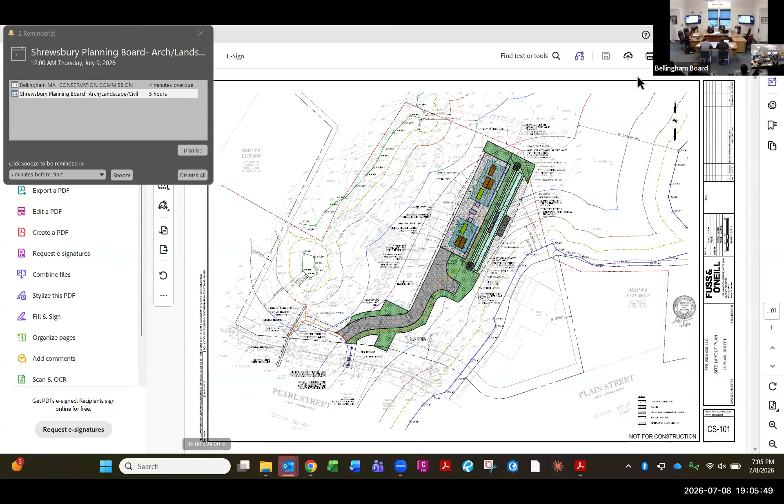Yeah, I'll let you jump in. Yeah, so as Tom mentioned, my name is Jack Denninger. I'm a civil engineer with Fuss and O'Neill. We worked on the site plans that you see here.

So as was mentioned, the site's located at 26 Pearl Street, which is identified by the town assessor as map 4, lot 60, and it's owned by the town of Bellingham. The site is approximately 19.5 acres, and it's bounded by woods to the north, the Charles River to the east, Pearl Street to the south, and then residential properties and woods to the west.

So the existing site within the limit of work generally consists of concrete foundations and material stockpiles. Again, which is generally speaking what you're seeing on the plans here. The northern portion of the site does become wooded, but for the purposes of our limit of work in our area, the existing conditions is primarily impervious with concrete foundations and material stockpiles.

Wetland resource areas were delineated by LEC Environmental Consultants on February 10th and 18th of 2022, and then confirmed on March 19th of 2026.

Those resource areas consist of bordering vegetated wetlands to the west and northwest of the existing developed area, isolated vegetated wetland to the west of the existing developed area, bank and mean annual high water line to the Charles River to the east, and the 200-foot riverfront area associated with the Charles interior to the site. A portion of the site does lie within the 100-year floodplain, however all of our proposed work is at an elevation above the 100-year floodplain elevation.

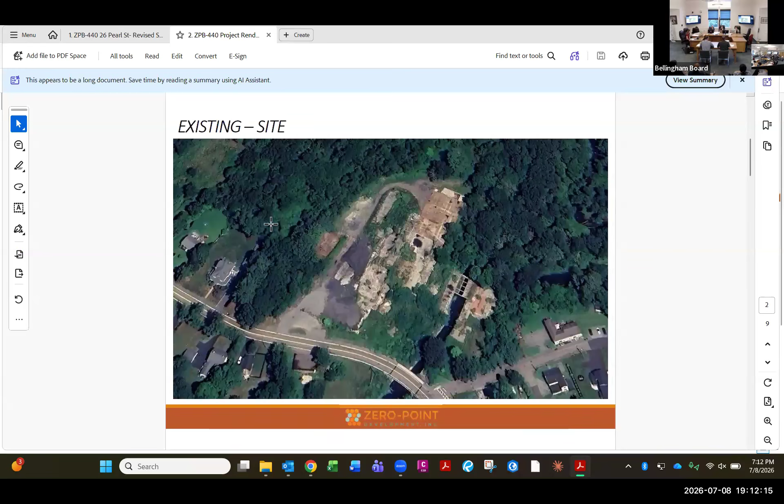So this is existing conditions of the site. Got two pretty massive piles of asphalt millings on site right now, and then there's a big pile of bricks in this general area here right now.

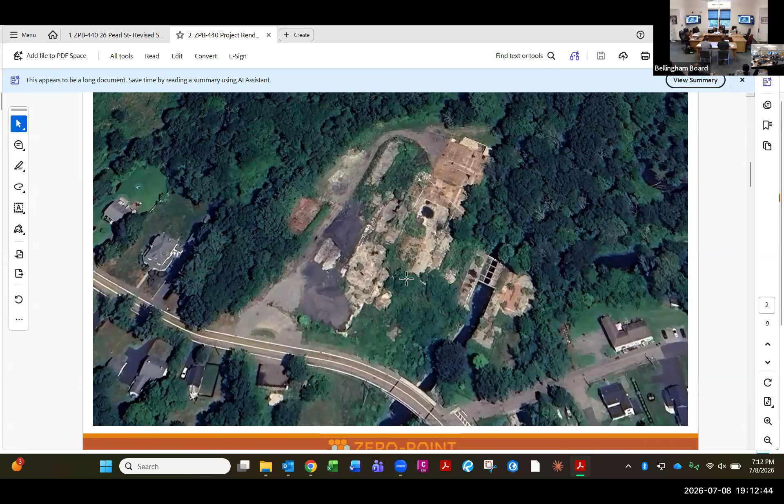So that's all going to be, well, the asphalt millings are the DPW's and they may move them to the other portion of the site, but the bricks over here along our site will all be removed from the site.

This gives a good depiction of what the site looks like when it's constructed: the access road coming in, turn around, infiltration basin along that eastern edge, and the electrical equipment all in a row. It's about a quarter acre of area that's going to be fenced in, and the remainder of the site is left for DPW facilities usage.

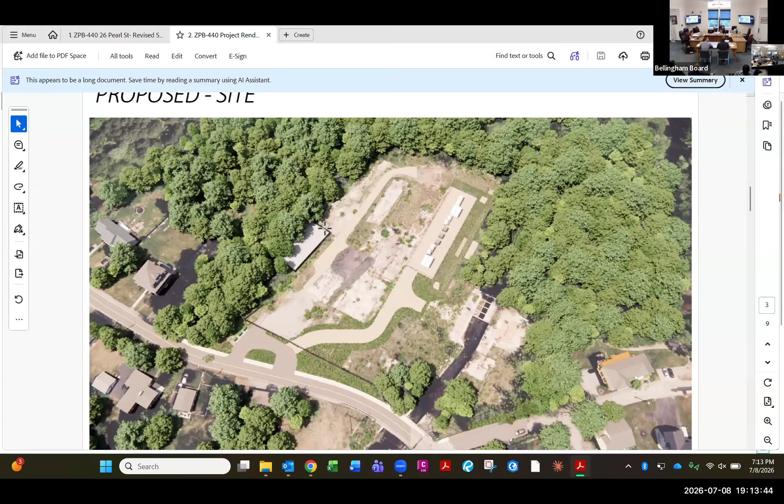Part of the request for proposal requires us to install a new fence along Pearl Street and plantings along Pearl Street, as well as a small material handling area, tan with a black outline, that the DPW uses maybe for some catch basin stuff. I'm not really positive what they use it for today, but we're proposing a fence there as well, as part of the request for proposal.

So that aligns with everything that we're required to meet. There's some extra screening here from Plain Street.

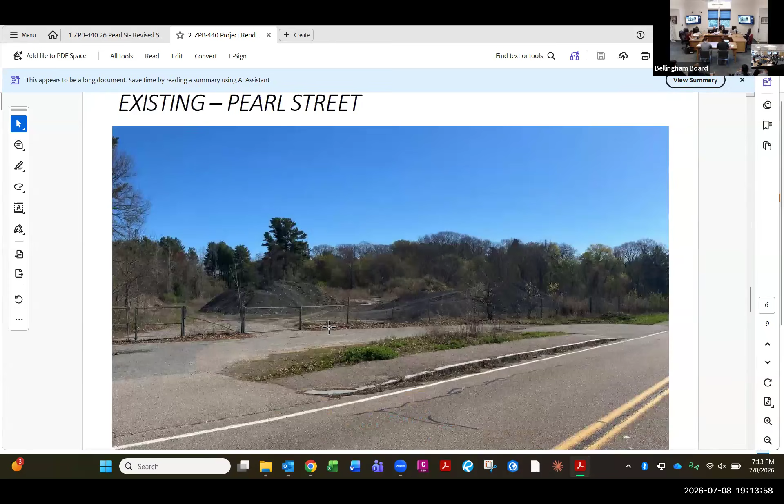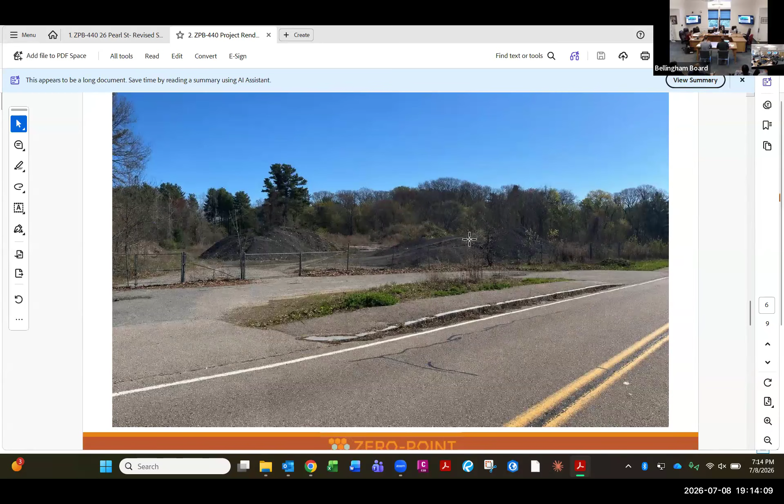Existing Pearl Street, you see the asphalt milling piles there. Our access road pretty much comes in to the right, to the east side of this front-most existing pile of asphalt millings. And here's proposed conditions with the new fence.

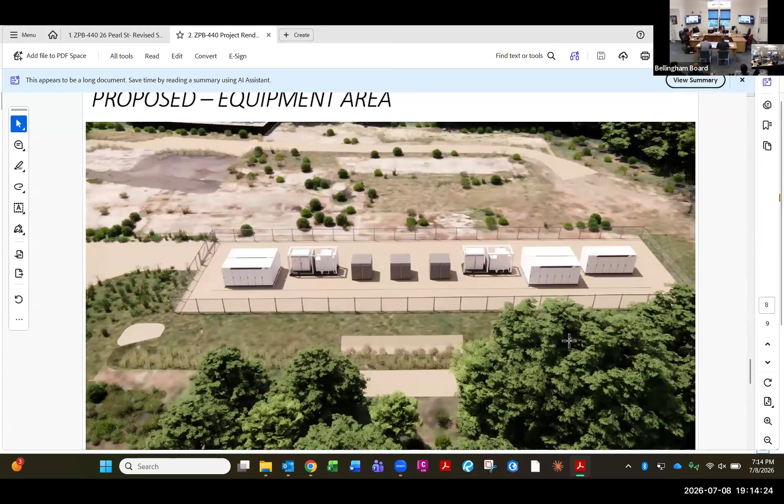We are bringing a hydrant across the street, just to note. And here's the site a little bit closer, zoomed in.

So Jack touched on secondary containment. We anticipate DEP drawing down some comments to require, under a condition, secondary containment of firewater runoff, the potential of firewater runoff. This has been consistent for the last probably 2 years out of the DEP office, and we have that language. We've worked with DEP on many other projects, and we've built and designed this system to meet those standards they would like to see. So just wanted to touch on that too here.

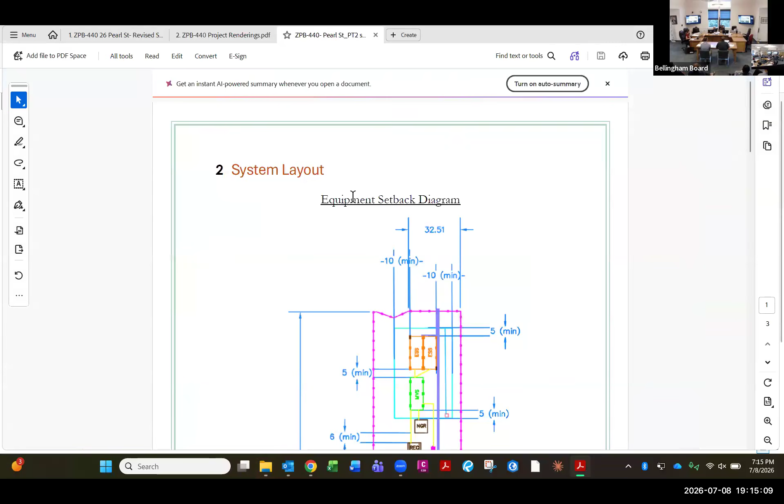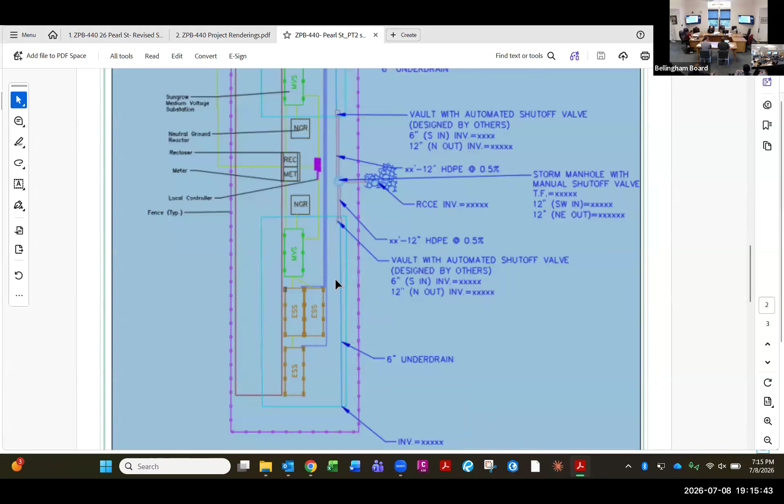So within the fence, we've got 2 areas of containment. The first one is this area here, containing any water falling within this zone around these three southernmost energy storage containers, as well as the green medium voltage substation, which is essentially a transformer. We did add that into the secondary containment area.

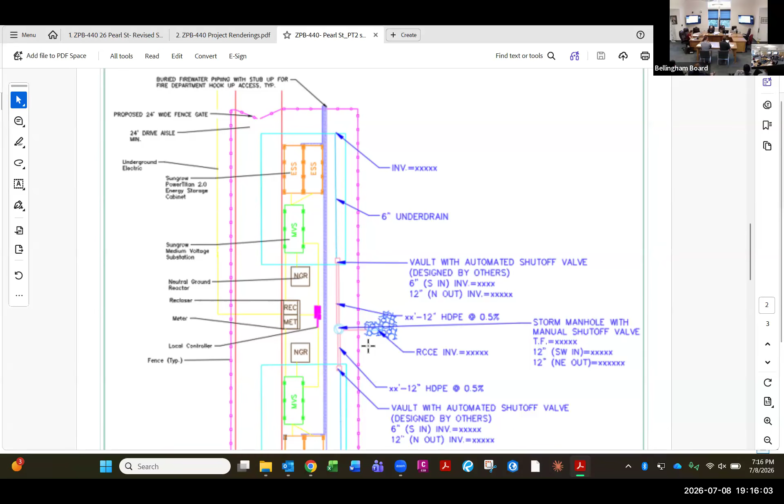And then to the north, there are two more battery containers with another transformer skid, so there's a separate containment area here. When we look back at the plans, they don't necessarily flow as shown on this diagram. The northern portion flows out to the north and into the sediment forebay, and the southern portion flows to the south and out into the sediment forebay down there.

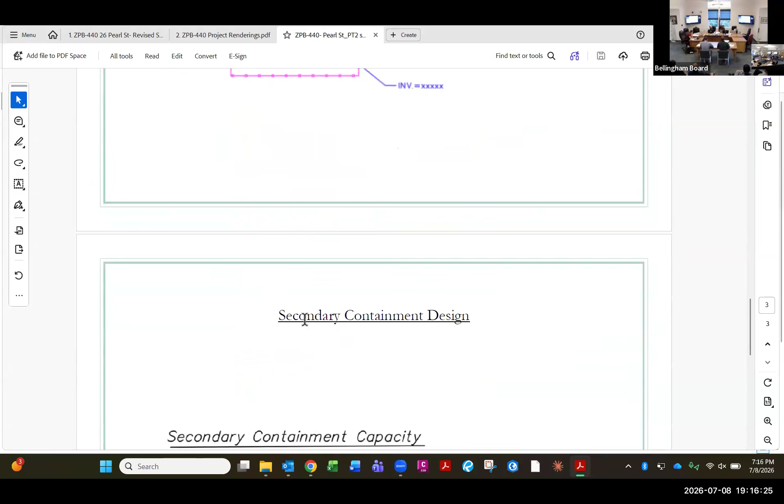So just to give you an idea, we're about 10 feet off the sides of the containers in each direction. And then I've got a volume calculation here: the total volume of both combined would be 17,000, roughly just under 18,000. But the northern portion, being the smaller containment area with less equipment, holds right around 7,000 gallons.

It's 1.5 feet deep, underground subsurface secondary containment system. It's a polyvinyl membrane, and it is constructed and installed by Basic Concepts Inc., so they're our contractor for the secondary containment.

They do systems similar to that you would see at the substation across the utility easement for large transformers. So it's essentially a polyvinyl membrane, just a big piece of rubber that goes subsurface 1.5 feet. It's covered with crushed stone for 6 inches above it. That's called a fire quenching stone.

So any liquids that may be on fire - in this scenario there's nothing that would be on fire as a liquid - but it does quench the flames as it goes to the ground. The southern portion has a containment area with a capacity of around 10,500 gallons roughly.

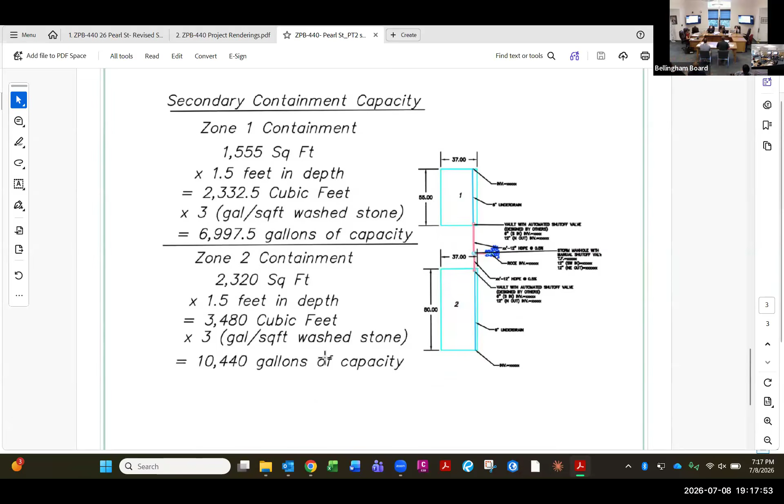So I just wanted to touch on that and show you here. This portion drains to an under drain on the eastern edge of the secondary containment that goes to a vault box within that containment area that has an automatic valve. So upon an alarm of an overheat, or if there was a fire and an e-stop was hit, that vault with the valve would shut, and that would essentially create a bathtub.

So any fire water that's used to essentially cool surrounding containers - there's no putting water onto a container that's on fire, you let the energy burn out - any water that falls within here would be trapped, and somebody like Clean Harbors would be there to pump that out, with water testing thereafter.

And I think we'll see that come down through DEP as a comment. But operationally, in normal operation, all that water is allowed to evacuate - it's just falling through the crushed stone and evacuating on a normal daily basis until an alarm is triggered, which creates the bathtub.

There's also another manhole just outside of each of these containment areas that has a manual valve as a secondary measure. That is also something we'll see as a comment from DEP as well. So I just wanted to touch on secondary containment and what that looks like.

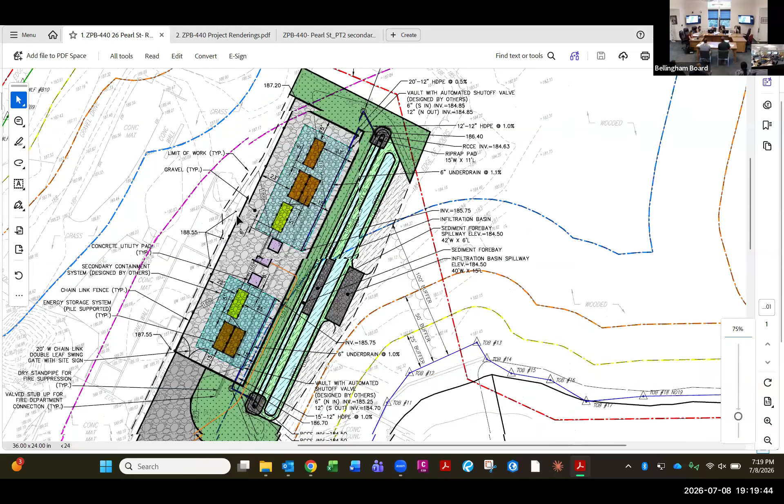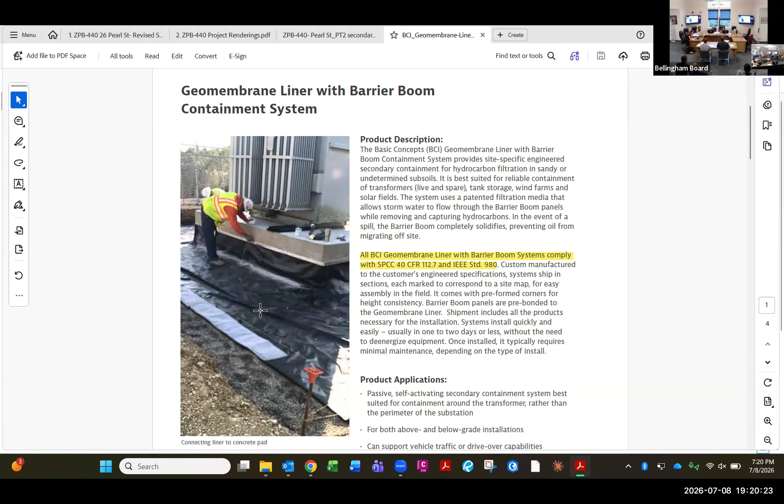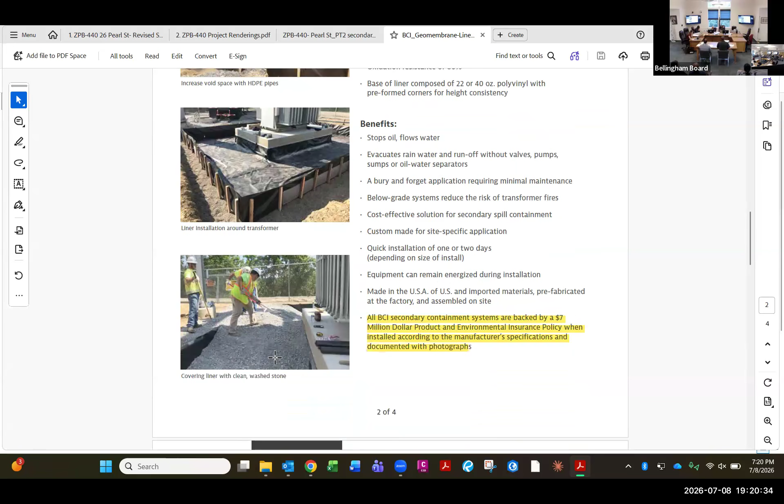So this middle picture here is really what it looks like when it's installed. And then it gets filled with the stone here, as you can see in this bottom picture.

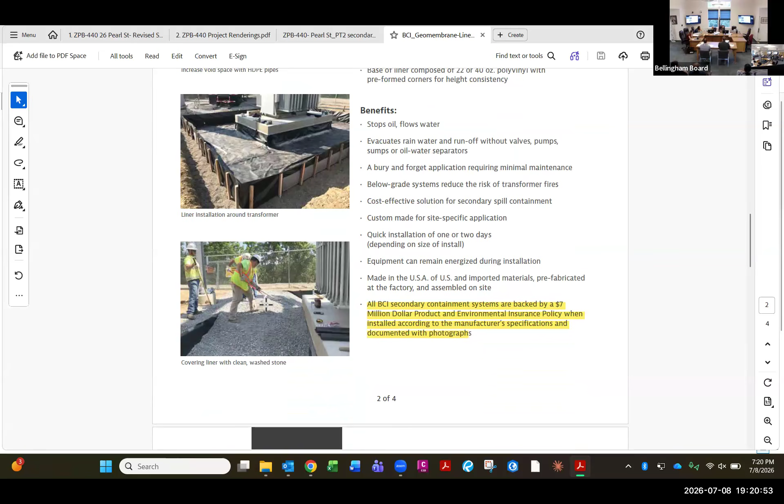All these secondary containment systems meet full SPCC regs. Not that this system has to abide by it, but it is a system that is backed also by a 7 million dollar environmental insurance policy through BCI. And this is just kind of a little rendering of what that might look like.

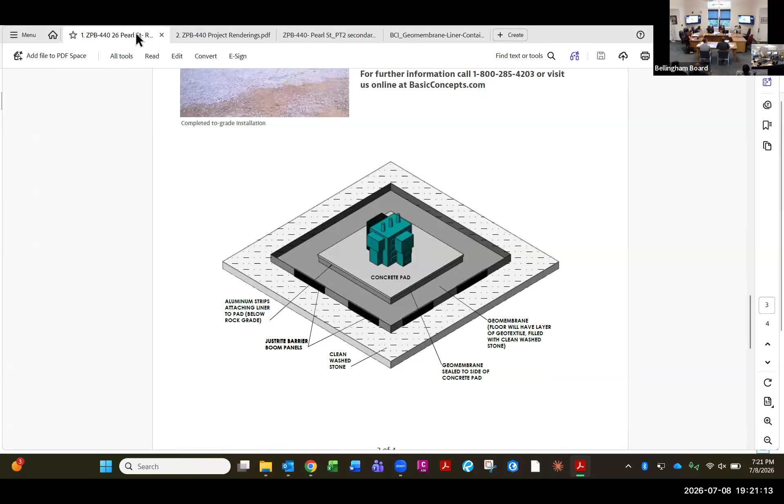I think that might be a lot of information, so I'll leave it back to you guys on when we want to proceed, and any comments that we wanna add or things that you wanna call out.

Not really to start. I think mostly just getting some peer review on this will be helpful. It is a lot of information. I have a couple questions, if I may.

Let me just note that the planning board's reviewing stormwater under a development plan application. The property is exempt from review under the local bylaw, so we'll just reference the planning board stormwater review for compliance with those requirements.

So first, you had mentioned that it's above the 100-year flood. How high up above is it? So I can kind of roughly show you on the plan, I was trying to figure it out here.

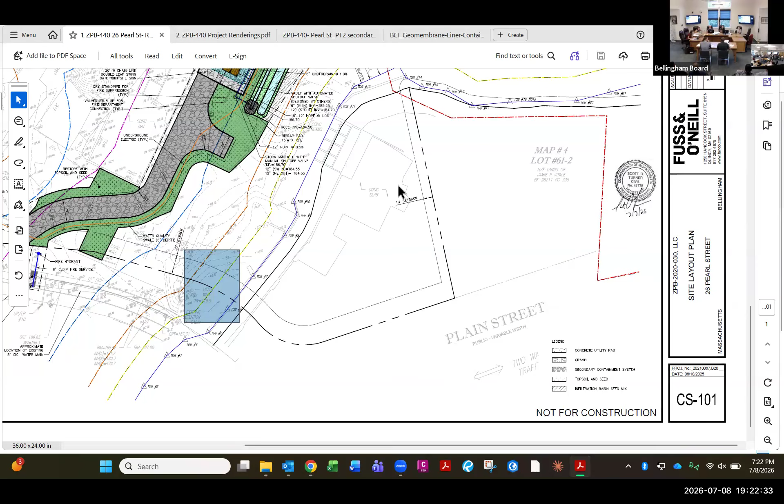So the 100-year flood, really, if you're on Pearl Street, on the bridge, and you're looking at the river north to south, the south side is all flood zone. On the north side where you're looking at our site, it's just a small portion, like right here, that's within the 100-year flood zone, and then there's a small portion like right over in this general area.

So elevation wise, Jack? Yes, so the 100-year floodplain elevation just directly adjacent is 182.8. The lowest portion of our work, which is the stormwater basin, is at 184. So that's like 1.5 feet above it.

And then the energy storage system itself, the lowest corner of fence line we have is at 186.4, and then it continues to go up beyond that. So that's 3.5 feet above it at its lowest point.

Thank you. Is that using the 2012 or the newest one? 2025. Okay, in the stormwater. Yeah, that's slightly outdated. We can provide the updated FEMA flood profile and flood map as well.

You had talked about the holding capacity of the water. Yes, about 18,000 gallons roughly. Does that include the gravel that's in there also, or is that in addition to the holding capacity, in addition to the gravel that is filled?

So that accounts for the gravel and the concrete pads within that square footage area. So the calculations, I can show you here. But it does, once there's a factor of 3 for crushed stone when you're looking at this.

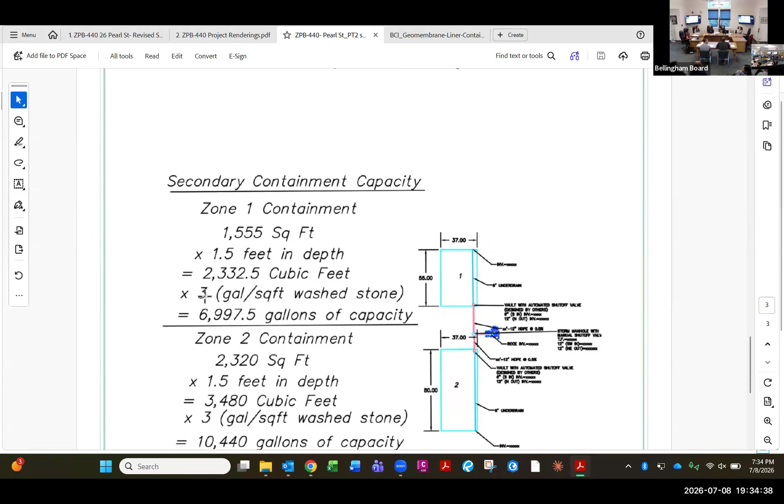Actually, this is the first one I have come to and I got a good amount of information. But I liked her approach.

For the record, ma'am, could we have your name and address? My name is Sri Praki. We are on 25 Plain Street, Franklin.

Thank you. Based on the information provided, I really like the inputs and questions you asked, and I would lean back to this madam, Pamela, to get some history, because there are neighboring houses and a community there. What are the impacts and effects based on the information provided? How would it impact, and based off that, can you make a decision?

You have not yet made it. It's gonna probably be a little while before we make one because we don't even have a DEP file number yet. We have a neighborhood full of kids and a good environment around, so we want to keep it along with the business. Thank you.

Anything else? I do have a few questions. Could you state your name? Oh, I'm sorry, Suzanne Domestico. I live at 10 Pearl Street, which is two houses away from the site.

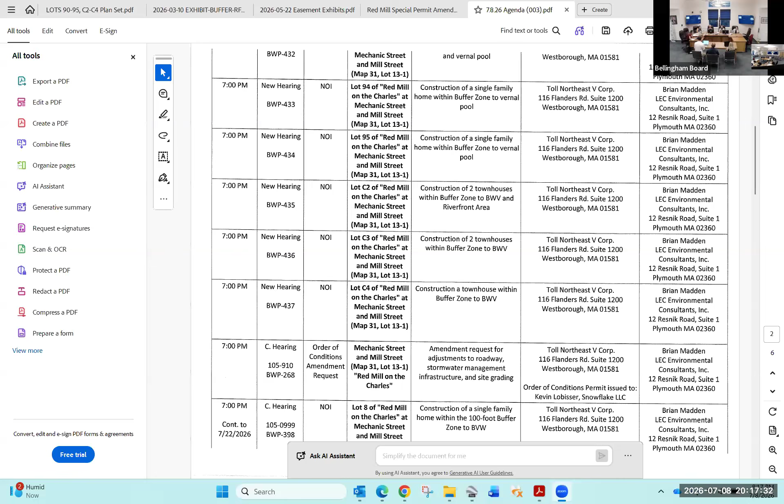Edward Finn, Land Development Director with Toll Brothers. And Liz Clark, civil engineer with Tighe and Bond.

So we have 9 new notices. This is the last batch of new notices. I'll go through them individually, but it's kind of a similar continuation from the past hearings.

Just to give you a quick update, we are very close to wrapping up the peer review with the planning board and overall stormwater management. There's a planning board meeting coming up later this month on the 23rd.

So there's been some back and forth. I think the list is pretty short at this point. One of the topics that we brought up each time is ownership of the wall.

Yeah, I know we kind of verbalized a little bit of that at the last meeting, but we're going to put it in writing and submit it in advance of the July 22nd meeting, providing additional information on what's outstanding to date.

But specifically, let's see, this lot - starting at 90, we left off on 89. This is in the easterly, northeasterly part of the subdivision, a single family dwelling lot. If you remember, there's a bordering vegetated wetland system to the east associated with an intermittent stream that flows through the easterly portion of the site, south to north. So lot 90 is within the 100-foot buffer zone partially.

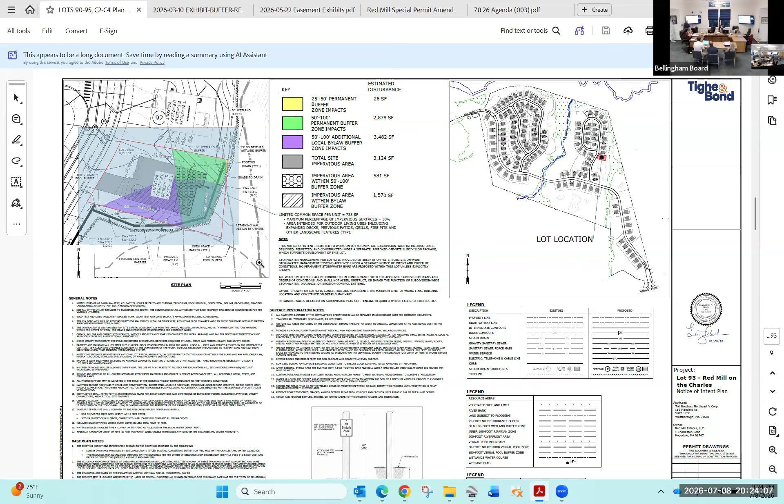Why is that wall there? I'll zoom in. Because you've got the vernal pool over here, and the wetlands there, on the east side it's 8.5. And then we're getting down to, hold on, I got some... Always gets in the way. Along the south side, variable between 8.7, 9.6 to 12.0, closer towards the southwesterly corner, closer to the roadway.

Brian, on that note of the height of the walls, where are those no disturb signs that I saw in the detail on the further part of the sheet there? Where are those no disturb signs being placed - above the wall on the private property, or below the wall where it won't be seen? Because they follow the open space, it will fall on the back side of the walls. I'll say here, and this is another bit of information we collectively owe you, there's going to be a 4 foot high black vinyl fence along the top of the walls that's required per code. It's also kind of a decorative fence, but it will be a good delineator for encroachment, or for safety purposes as well. Okay, I guess that's good to know. Thank you.

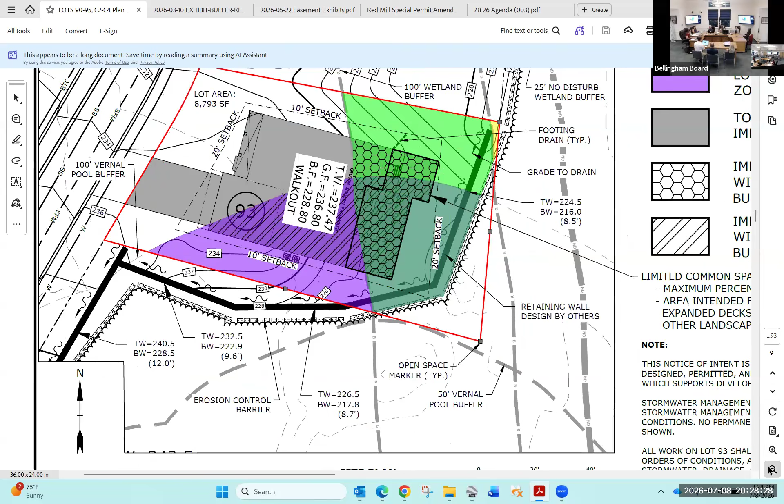I'm just going to zoom out a little bit. So this is 94, south of the vernal pool, which you can kind of see in the upper quadrant. Again, work is outside the 50-foot buffer zone. The 50-foot matches up more closely with the lot limits and the limit of work, so the open space boundaries are more coincident.

We do have that retaining wall extending, running parallel to the roadway and then coming onto the lot on the north side and wrapping around. There will be a fence, a 4-foot fence, at the top of the wall. Again, this is only work within the 100-foot buffer zone, 50 to 100 foot for the local bylaw.

So when they walk out in their basement, there's going to be a tall wall and then a fence on top of the wall? This is the wall that descends down, so there'll be a fence right at the top, and on this lot they're on the high side of the wall. So the fence is there to prevent fall hazards.

Oh, okay, all right — I was picturing the exact opposite, like they just walk out. Yeah, it's not for people that don't like to go outside. But some of these you've got an 8-foot wall. Yeah, you gotta have some fencing on that. You can see here the wall is a little bit taller — 4-foot is a dog condition. Not mine. Oh really? Mine are like... oh yeah, you're a little guy. No, I think my girl could be.

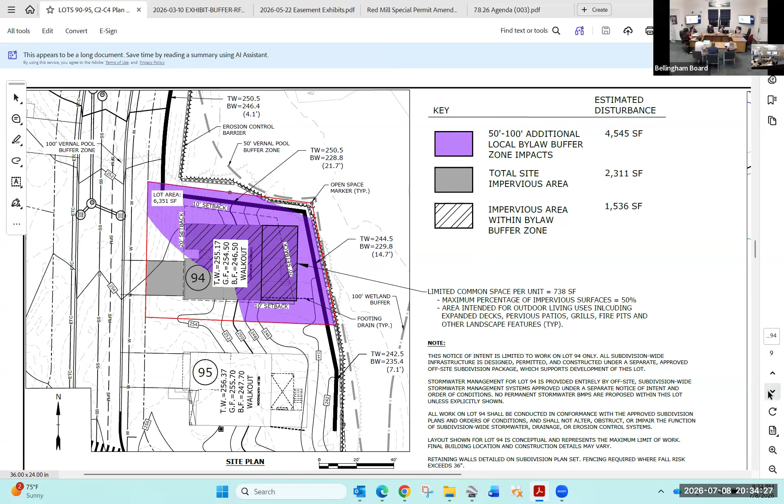Moving down to the south, this is the last single family lot, a continuation of the buffer zone to the vernal pool, with the wall terminating, kind of dissipating, basically at the southerly terminus of the structure, or coincident to it. So we did see an opportunity, based on some of the past discussions on this lot, to provide some revegetation within this 100-foot buffer zone of the vernal pool.

I'll zoom in a little bit because it may be hard to see some of the cross hatching, but this area would all be revegetated and left alone. We're proposing to plant it up with arrowwood and sweet pepper bush. I think those were some of the species we talked about previously in some of these areas. That will run and abut the retaining wall running parallel to the roadway. It's mainly off lot.

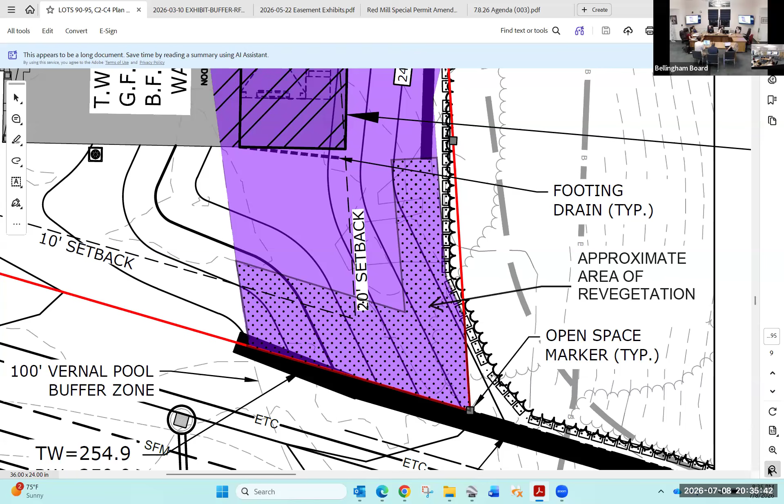So if we have any questions on the single family lots, I can turn it over to the 3 townhome lots where there's some minimal to variable work and jurisdiction and buffer.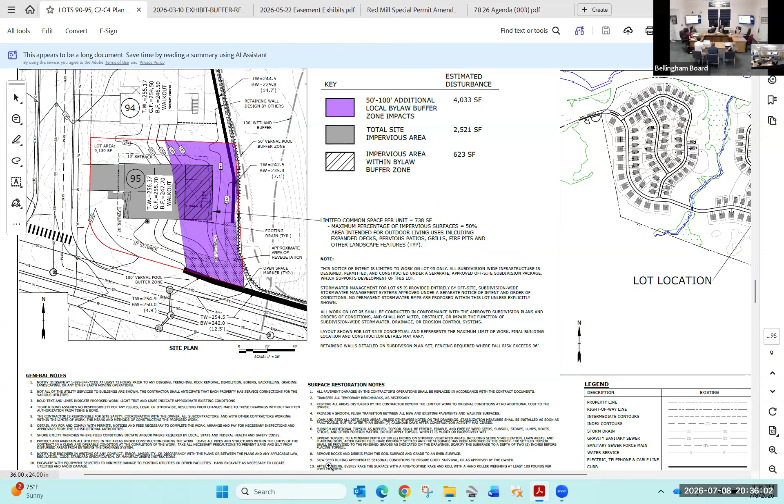All good? Yep, thanks. So moving down to lot C2, this is a long rectangular type lot within the southeastern portion of the subject parcel. There are 2 ends of this lot where work occurs within jurisdiction. You can see these 2 areas highlighted in varying shades of green, with the west side, the darker green, being some minimal intrusion into the outer 200-foot riverfront area to that centrally located unnamed perennial stream that flows south-north through the middle part of the site.

I'll zoom in quickly, and it's pretty minimal intrusion. A small portion of the structure just clips the outer portion, but it's mainly regrading along that edge.

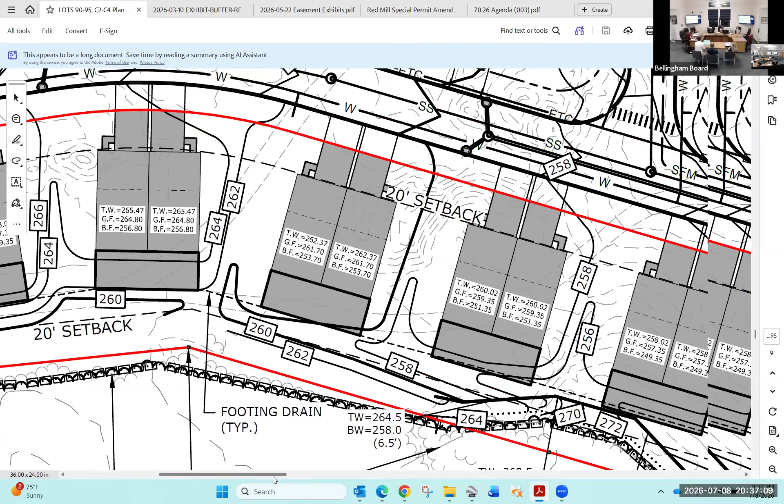The proposed riverfront area alteration is about 2,400 square feet, with only 64 square feet of structure in that outer 200 foot zone.

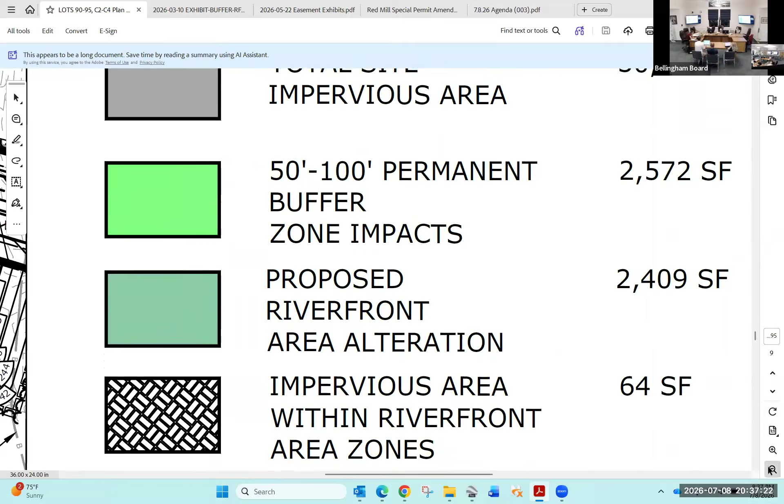As we talked about, can you go back and keep sliding right? I just want to see the riverfront area - if you can blow that up a little bit and switch to another plan that shows this in larger context, so I can see where the river or stream actually is and visualize what's changing.

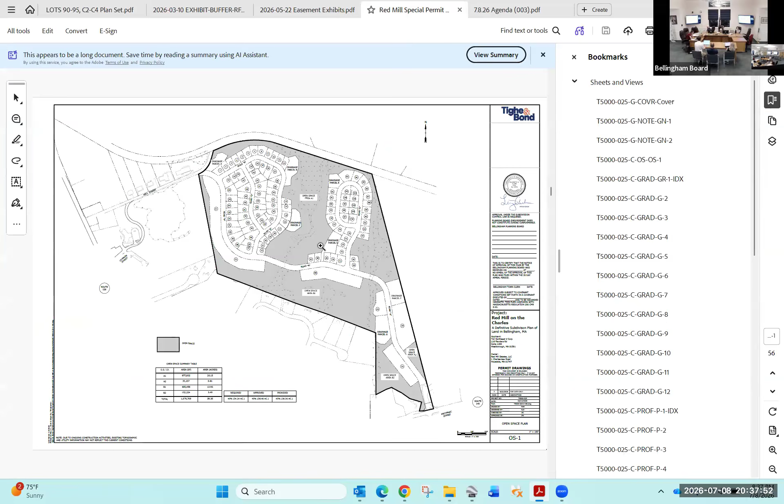It's 200 feet away. So this is lot C2 - the structure is over in this location. Here's the wetland system with the perennial stream. So that answers me, the majority of the riverfront area is within the open space, but you're not affecting the bank in any way - you're still well away from it.

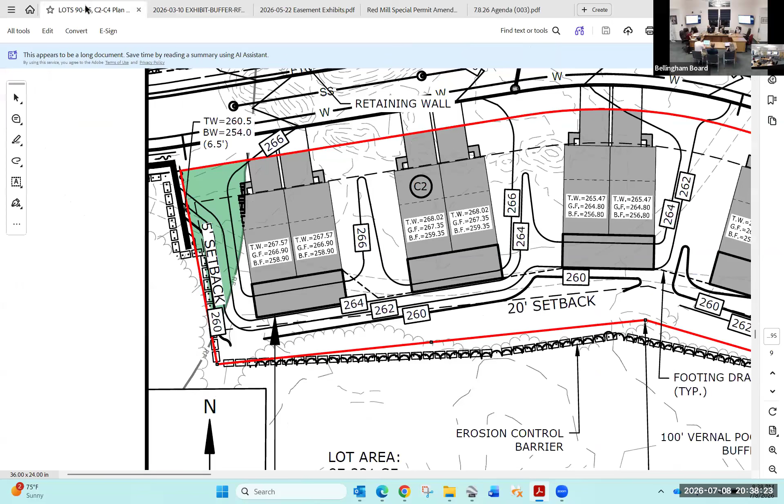All right, so that's the western portion. The easterly portion minimally extends into the 100-foot buffer zone to the BVW associated with that intermittent stream. I'll slide over to the larger plan set so you can visualize that - here's the easterly portion of C2, and here's the intermittent stream BVW wetland system.

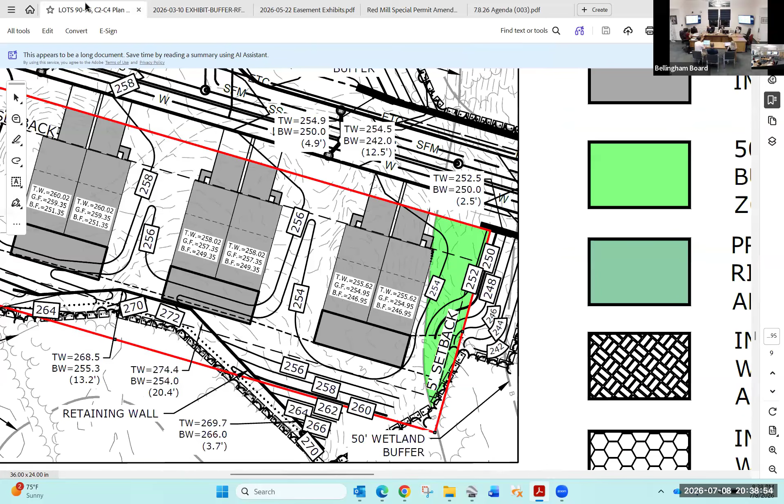I think it was 5 square feet of structure in the outer 100 foot, mainly just regrading. And then you have a culvert that goes under the road. Are you talking about the second wetland crossing? We'll address that later.

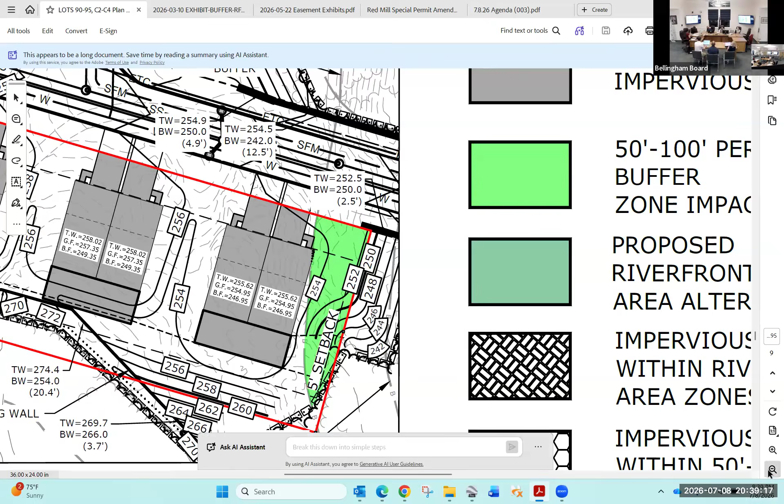And just of note here, there is a vernal pool further to the south - I'll zoom over, this is a vernal pool right here. There's also a vernal pool within this larger ILSF system. For the smaller vernal pool, we are staying outside the 100-foot buffer zone. You can see it outlined here, and then there's a wall located up gradient of that retaining wall.

It's going to go right up to the house, right up to the edge of the outdoor living area. Presumably the reality is we wouldn't fully build out that outdoor living area - there'd be a deck off the house, but we wouldn't extend all the way to the end. There'd be a passable area above the wall. But again, that's mimicking the prior approval, the original approval for limit of work, no changes here. I think this wall may be new, right?

Again, resulting from the same level of detail we're now providing once you add in the homes, given that the previously approved plans just showed a graded pad, not our homes with the detailed level of grading we're providing now. So some new walls were added, to establish the open space markers along some of the staggered midpoints. Certainly if the commission wants adjustment on some of these townhome lots, we can do that, but the area behind those retaining walls would be left alone to naturalize.

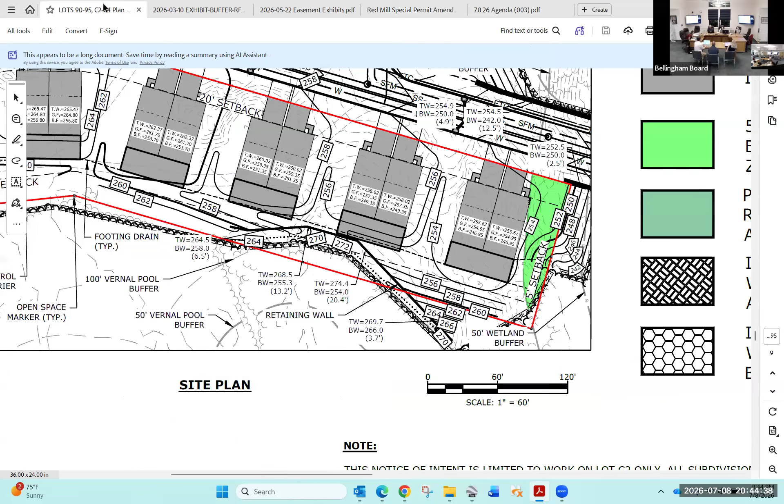All right, well, I'll move on to the next, and just for orientation purposes. So here's the second stream crossing. This is an intermittent stream crossing where we have two townhome lots within jurisdiction, again, to the 100-foot buffer zone of BVW associated with the intermittent stream running through the easterly portion of the lot. So it's lots C3 and C4, and I'll switch over to the plans for those.

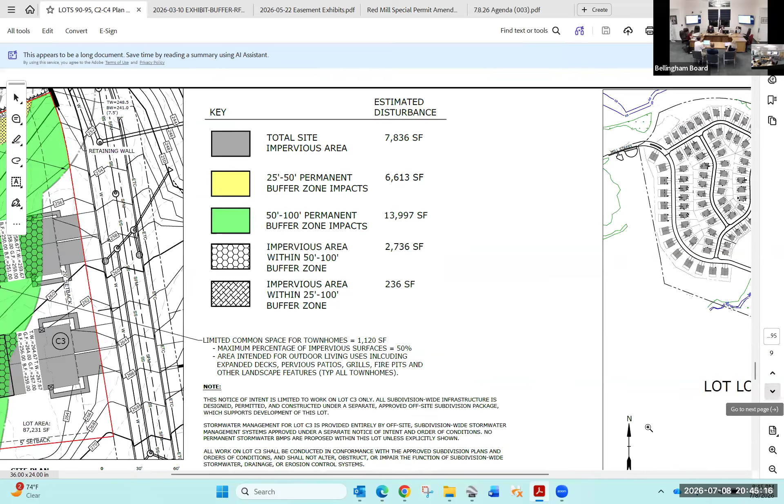So this is the first one, C3 to the north. So you're coming down the roadway post crossing. It's on your right, the west side, where we have two townhome buildings located within the 100-foot buffer zone to the BVW.

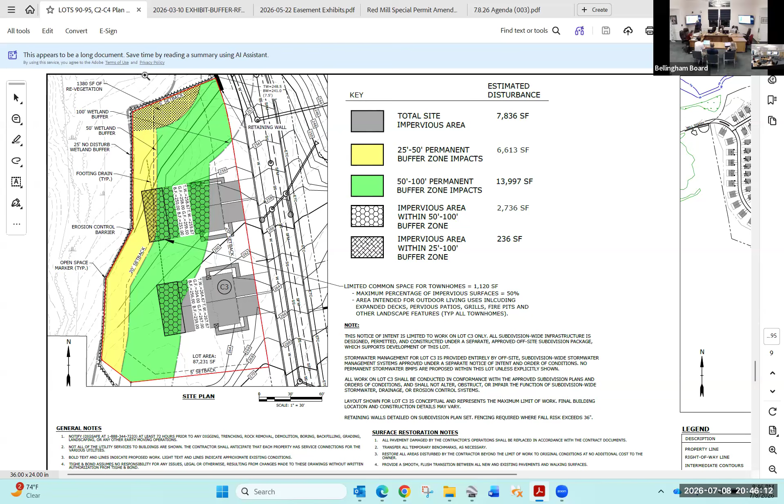And we provided the breakdown for the impervious within 50 to 100 and the 25 to 100 - I think that should be 25 to 50 probably - is 236 square feet. And again, this was a lot based on some of the prior discussions that we acknowledged that there was an area we could revegetate once we completed the regrading. This stippled area up in the northerly portion of the lot, overlapping within the 25 to 50 foot, will also be replanted with what we spec'd out, and what we talked about to date was arrowwood and sweet pepper bush.

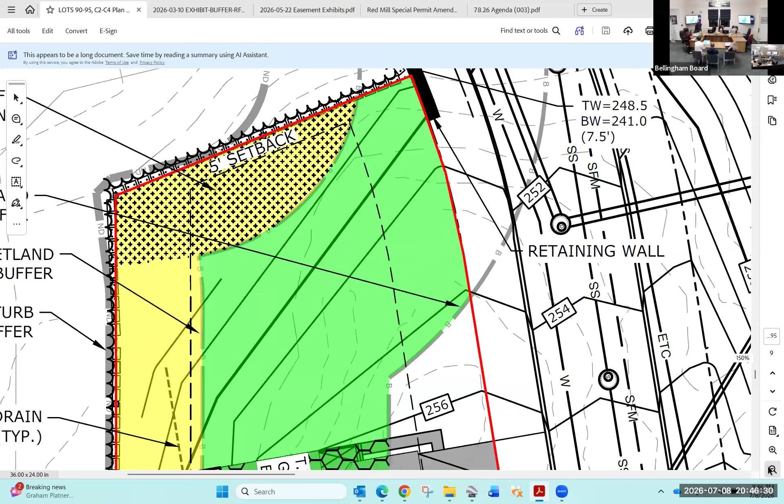I think that would be helpful, especially because we talked about before, like some areas you were gonna just leave naturalized, some was gonna seed, some was gonna be shrubs or trees, and it kind of varied between.

Yeah, and we do - that is one of the items that we are working on from the community-wide, subdivision-wide revegetation effort that's largely off of the lots, but anything specific to the lots, we can certainly provide some additional detail there. And because we are going to incorporate some of that onto other lots that are being updated and will be submitted probably next week before the meeting on the 22nd.

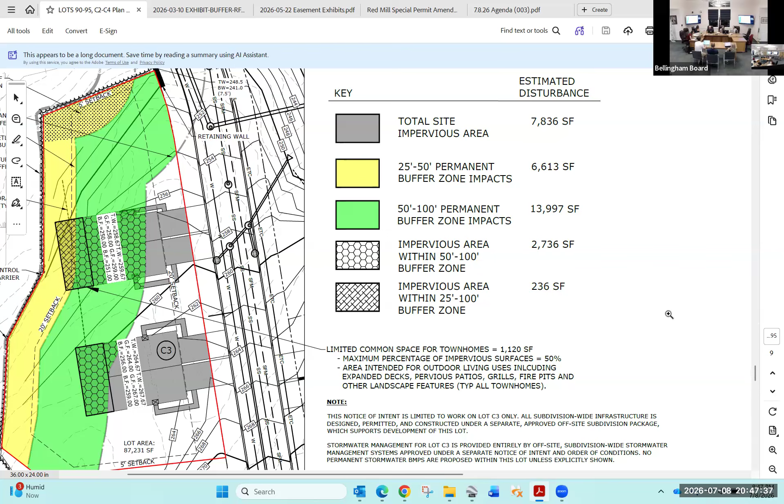So lots C3 and C4 are separated by a drainage lot. Once you go down to lot C4, only a small portion of regrading extends onto the lot, and 537 max impervious between the 50 to 100 foot. And again, that's worst case max build out scenario for the outdoor living areas. But there is a small portion of the dwelling itself that's within the outer 100 foot. So that one shows grading that goes beyond that green area.

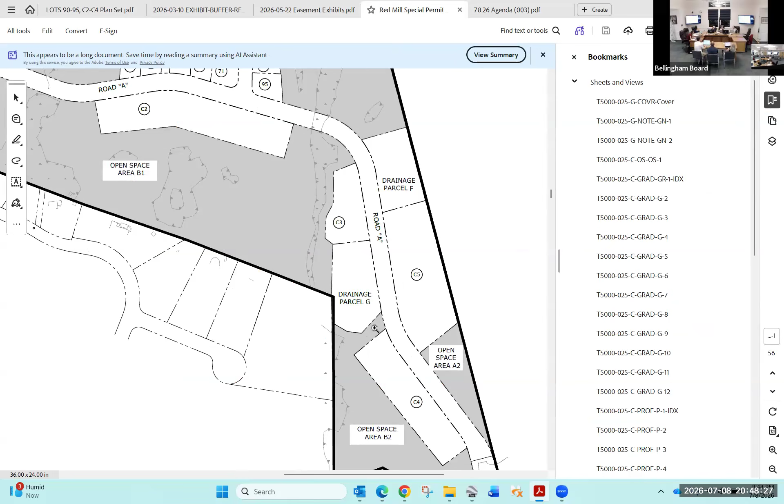Yep, so that's kind of an extension of the drainage lot that does extend here. Let me get to the actual regrading so you can kind of see how that blends together, just for perspective. So those impacts would be carried in the overall - yeah, because we're just capturing what's on the townhome lot in this filing.

But this was all approved previously. I think this expansion, or there was some modifications to the basin in this location that is being addressed as part of the peer review and included within the amendment request to the order. But you can basically see it's a continuation of the regrading from the drainage lot onto C3 for this structure. You can see the BVW here - it kind of juts on site and then goes off site and then pops back out over.

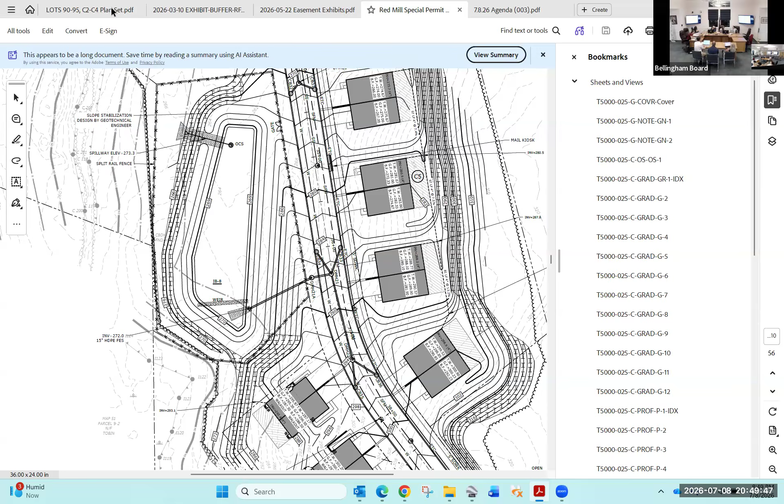So we got a few additional items to provide additional detail on. Any further questions at this point? Nicole, James? No.

Well, thank you all for the feedback and moving the ball forward here, and now we just gotta go back and get through the amendment request, give you some updates there, all the information we've talked about to date, and some updates on the individual outstanding notices. That basically included some of the revegetation areas that we talked about. And some of the original early plans didn't have all the open space markers, which we're now adding. But I think once we get the overall revegetation exhibit to you, community-wide, what we're revegetating, hopefully it provides a better perspective of everything.

We would request a continuance to the 22nd. Before we do that, just a question - you had sent a letter. That second one's related to the amendment. Oh okay, yeah, so we're okay. Never mind then, we'll wait for that. We'll be ready to talk about it.

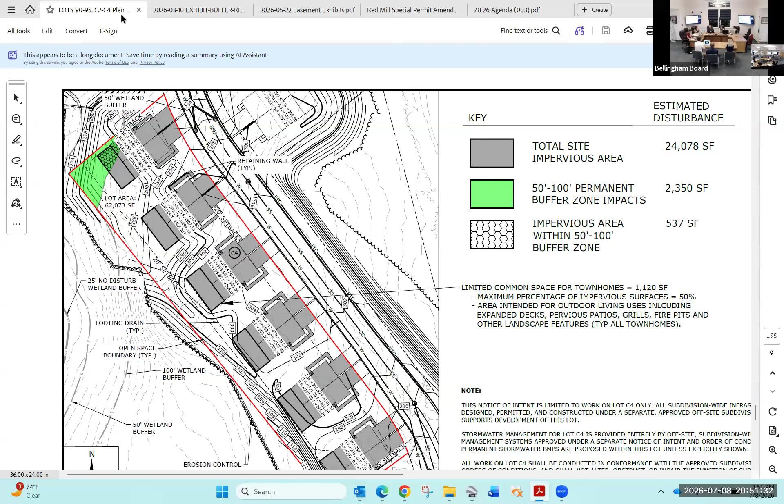I will entertain a motion to continue the hearings for lots 90, 91, 92, 93, 94, 95, C2, C3, and C4 of Red Mill on the Charles to the evening of July 22nd, 2026 at 7 p.m. So moved. Seconded. Discussion? All right, Pam? Aye. Nicole? Aye. Don? Aye. James? Aye. Thank you.

Thanks so much. Yeah, thank you. Yeah, where did you want? All right, you won't be the first. Yeah, you sent them a request. All of a sudden, what is it now? Guys leave, we'll have to remote. Been happening all day. No, we did. Thanks so much, appreciate it.

The applicant has requested a continuation for the order of conditions amendment request, Mechanic Street and Mill Street, Red Mill on the Charles. Amendment request for adjustments to roadway, stormwater management, infrastructure and site grading. The applicant is Northeast B Corporation and Brian Madden, LEC Environmental is the consultant. I will entertain that motion to continue to the evening of July 22nd, 2026 at 7 p.m.